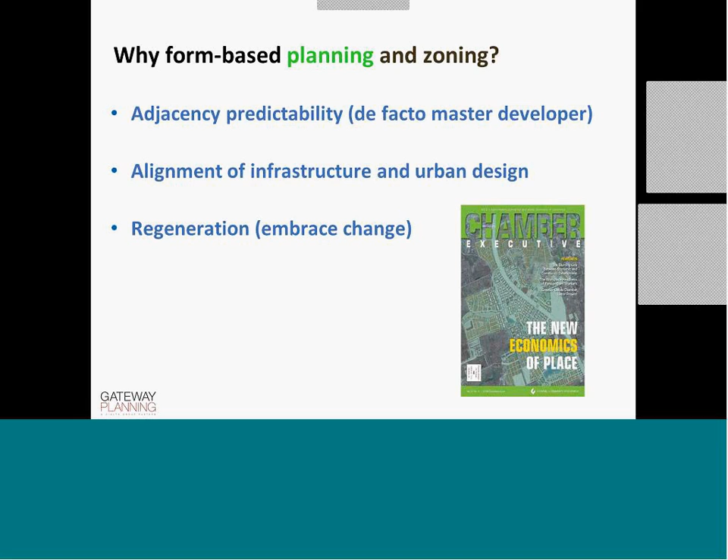Again, as I said, that's the form-based approach. And by the way, when I said planning and coding, I meant that's key — you can't just adopt a form-based code. You have to plan it and then calibrate the code from the planning.

In the development environment, the key, I think, is focusing on building on prior investment and reinforcing authenticity. I want to say it again: building on prior investment and reinforcing authenticity.

An example of one recent effort: a small community southeast of Austin called Bastrop, on the Colorado River. This is the Texas Colorado River — you can see it running from the northwest down to the southeast. This is near where the new Formula One racetrack is, and the airport. Bastrop has a historic downtown on the Colorado River.

There's an incredible amount of potential. It's a linear downtown with the main street that runs parallel to the river. There was an SDAT — volunteers came in from around the country and said, how can you move this downtown into the modern era and preserve what's great about it, which is being encircled by this explosive growth of Central Texas?

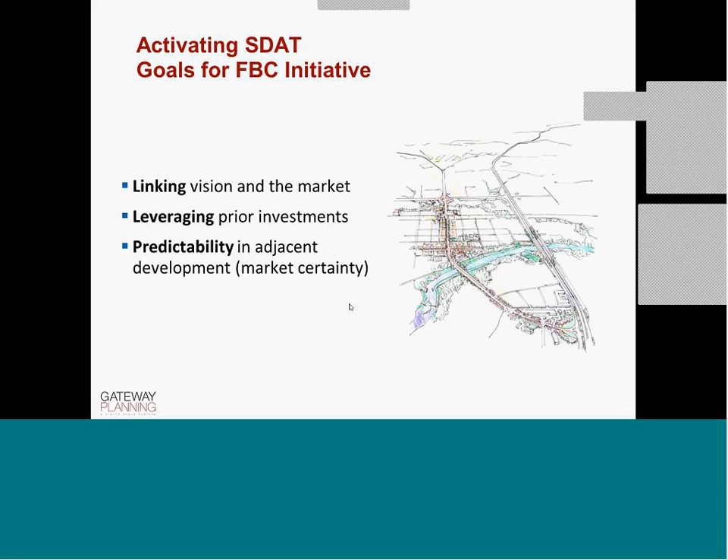Consumers of places — placemaking and development real estate are linked to the market because the consumer wants walkable places. Leveraging prior investments, as I said, historic cores have a lot of things right that were done 70 to 100, 150 years ago, and this notion of predictability.

Predictability means: if there's a block in a downtown and I want to borrow money to build a new building on that block, but I'm on the block next to it — I don't know what's going to happen next to me under a conventional suburban zoning regime applied to a historic downtown, which is typical of a lot of places in America today.

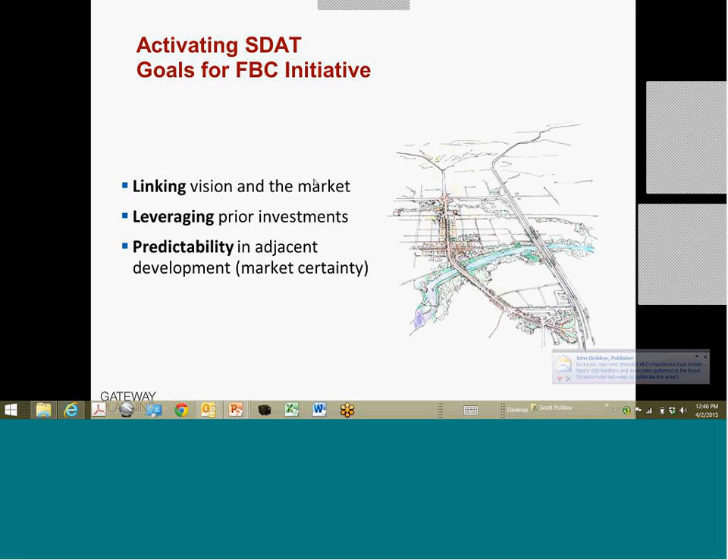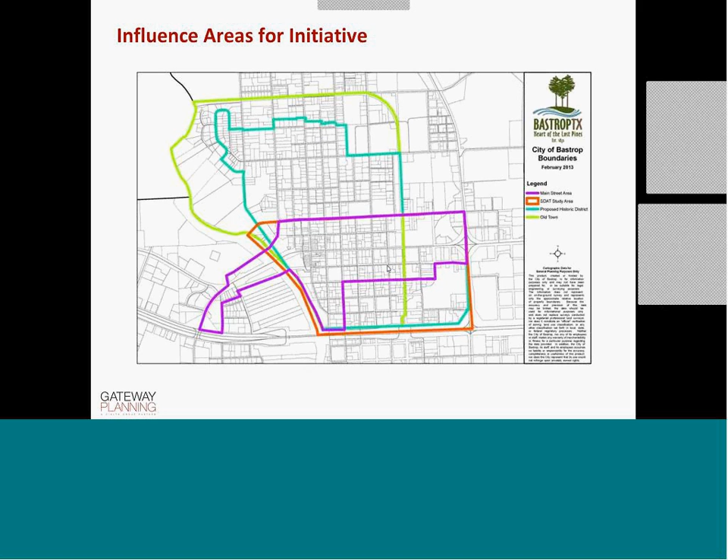The question at the beginning of the planning process was, what's the planning area? And we said to the city, let's have the courage not to establish it at the very beginning. Let it go organically as we go through the process, understanding what stakeholders believe should be the influence area for the downtown redevelopment initiative.

We did a market study with Catalyst Commercial, Jason Claunch, who once worked for Billingsley Company Development. Lucy Billingsley started that company. She's the daughter of Trammell Crow.

We did a series of interviews around a map and aerial, taking note after note with meeting after meeting to understand the politics of the market and the culture of downtown.

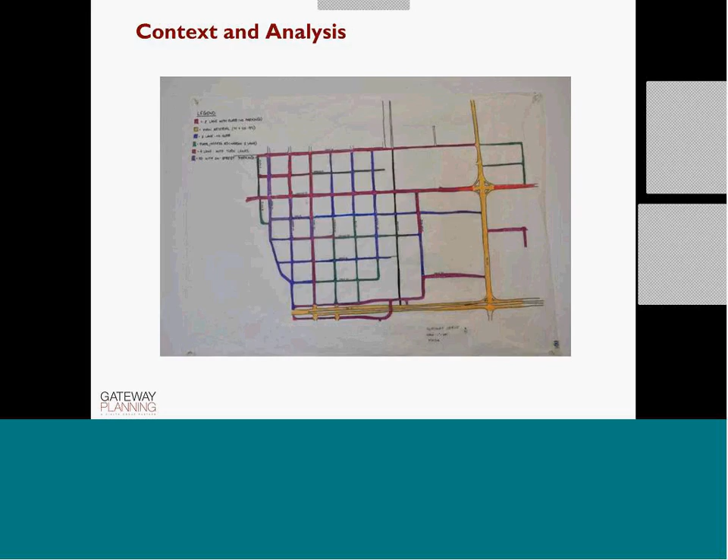One thing we did was say, look, Main Street - and this is the aerial view down - most of the historic building fabric is still there. For Main Street, it was basically about how can we code this for preservation without encouraging too much change. In this code we developed, we focused on the process of reinforcement versus the process of redevelopment.

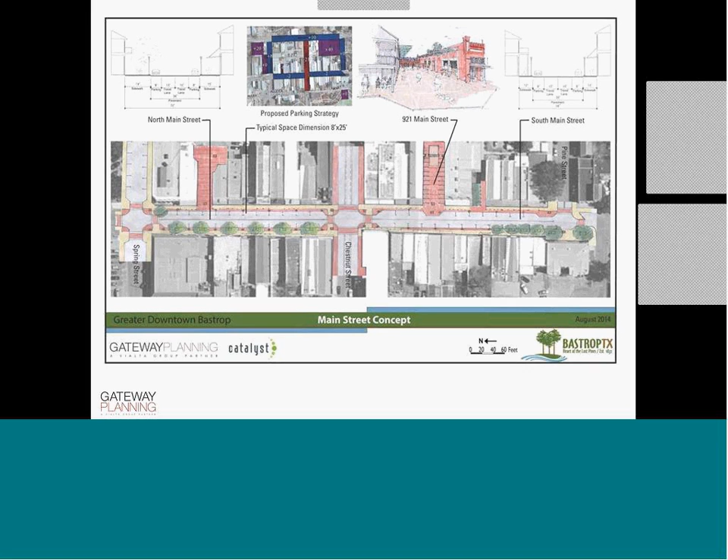This is illustrative, but I believe in the form-based approach - if you don't go to the building scale and design analysis, it's very difficult to calibrate form-based codes for development.

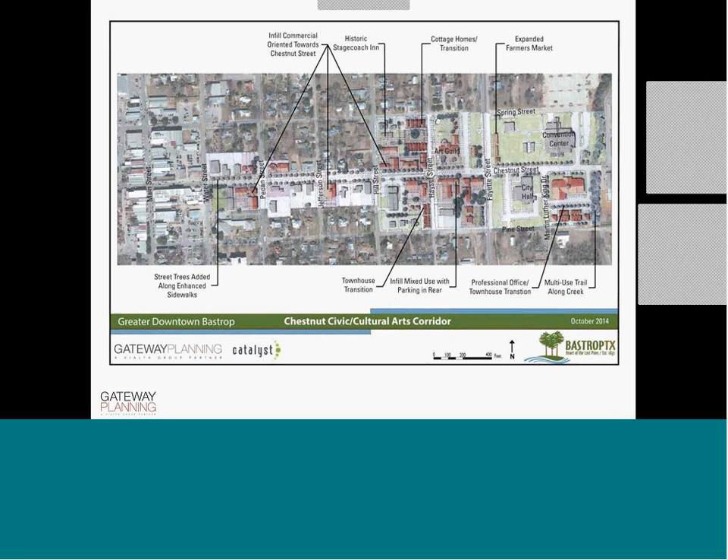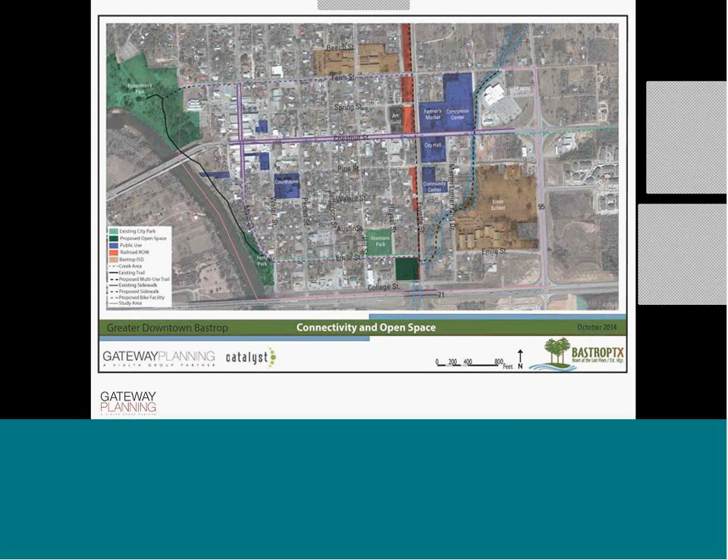We looked at the various additional neighborhoods around the core of downtown, and went back and started refining our connectivity strategy in terms of infrastructure.

All that added to the creation of a regulating plan, which has what we call character zones. If you're using the SmartCode, it is essentially the transects, but in this case we didn't use a transect-based code. We used a code we created from scratch so that each character zone really brings the authentic fabric to these different distinct areas.

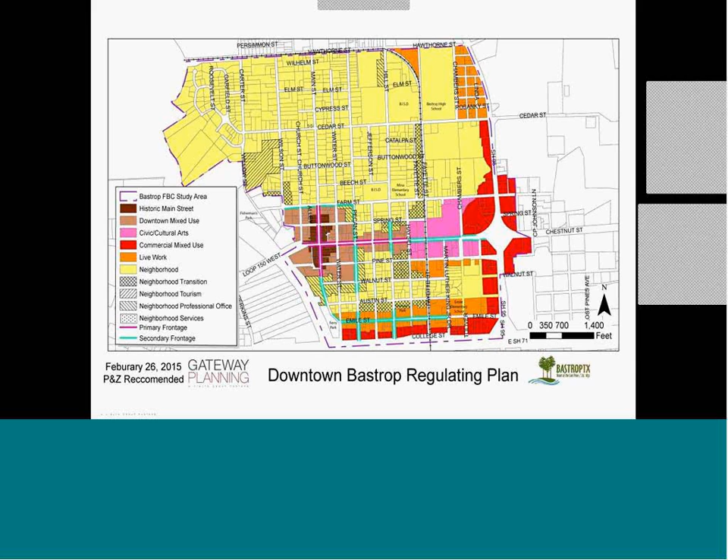You can see the dark brown to the left for 3 blocks is the historic Main Street. The mixed use is around it in the lighter brown. As you go into the neighborhoods, there's an old courthouse area that has a lot of converted businesses - we call that the commercial mixed use - and we have some transition areas.

And then we started to flesh out the character of each of these character zones. So, for example, the neighborhood professional office, which is the yellow area around the old historic Main Street and the house, we start looking at the scale and types of uses that might be allowed.

Remember, form-based is still regulating uses, but not as a primary regulation. You characterize and categorize the uses for each character zone that would be allowed as a matter of right.

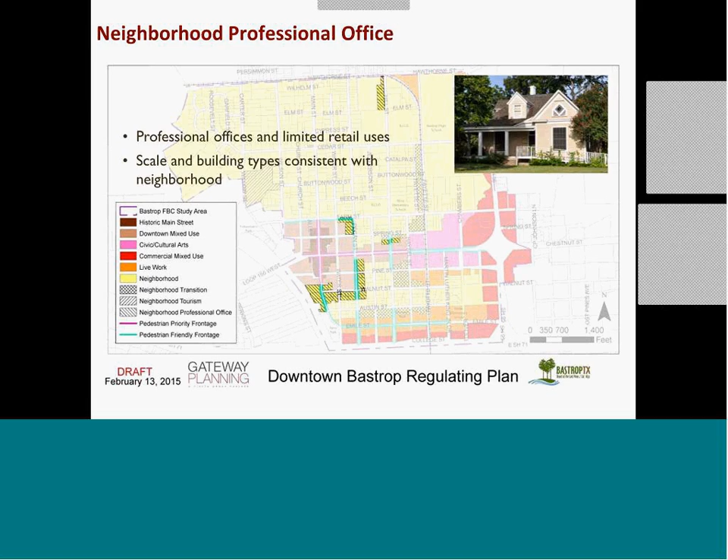The various transition areas—remember also, form-based coding focuses on transitions within the neighborhood versus buffers. That's power from an economic development standpoint. With buffers, you lose the opportunity for that fine-grained experience, the people experiences, the better architecture, the more fine-grained infill.

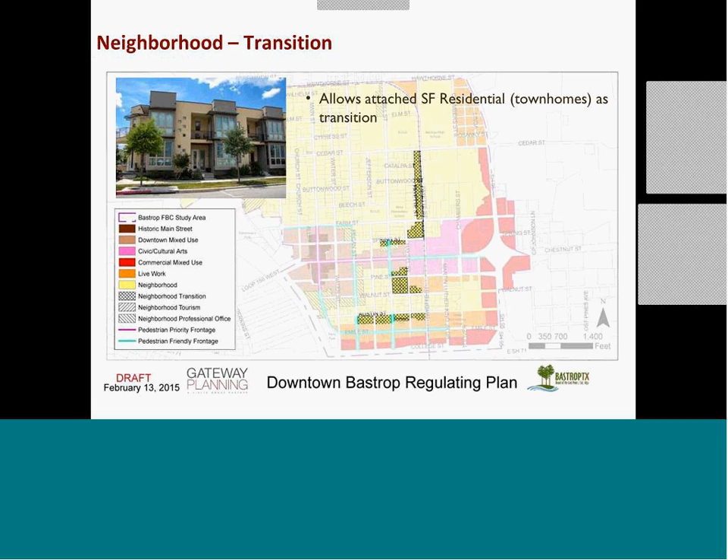If you use buffers and walls and hiding things versus transitions, like townhomes for example, as you can see here, which we're coding for, so from the more commercial development to the single-family, code it for townhomes and show how the townhomes can be developed. That's much better than walls and heavy landscaping buffers.

Code itself is broken down into fairly simple component parts. Regulating plan—we use the early planning as an illustrative vision and actually go through the actual elements.

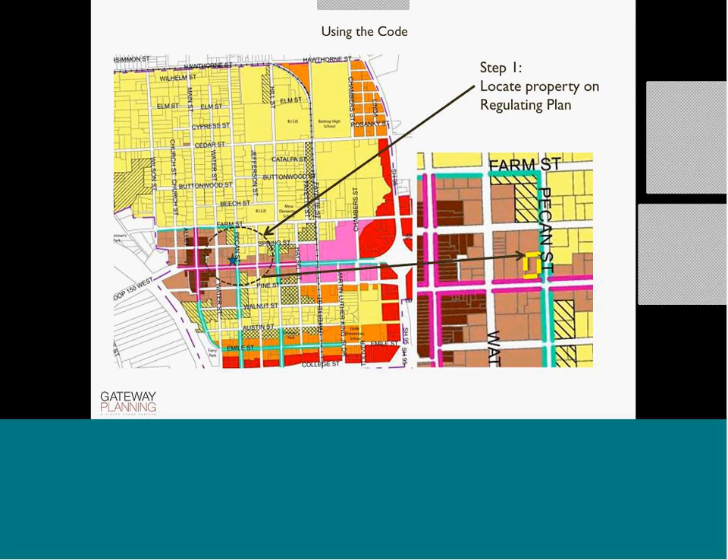And so in this code, the use of it is pretty simple. We locate the property on the regulating plan. Step 1, what character zone is it in. We then determine what type of frontage it has, and what we mean by that is the economic development benefit of form-based codes is to tie together the frontages in front of the buildings and the frontages that are the transitions to the street itself—that's the pedestrian zones or the hangout areas.

And we code both to ensure that we align the context, character and function of the private frontages, the forecourts or the entryways, and the cafe environments to the public elements of the pedestrian zones.

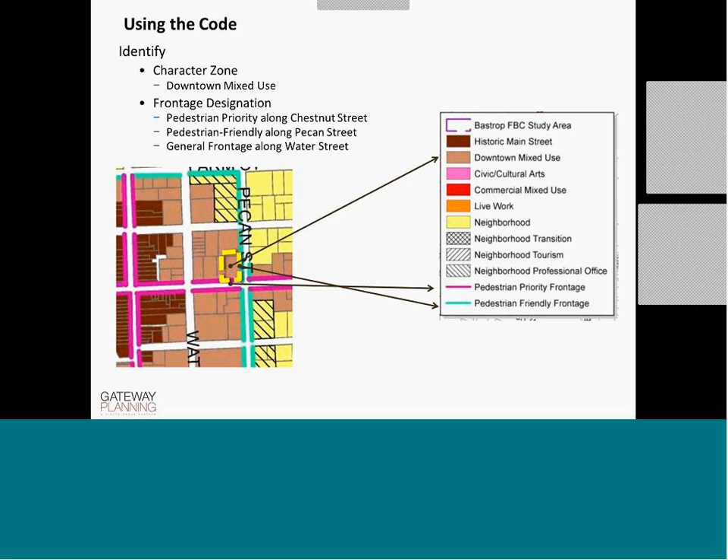Within that character zone, you look for what is an entitled right, a use as a matter of right, and it tells you in that character zone what uses you can do.

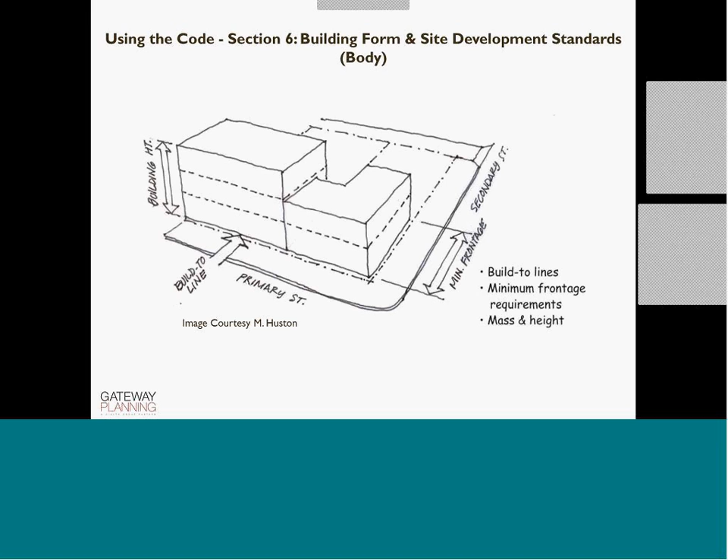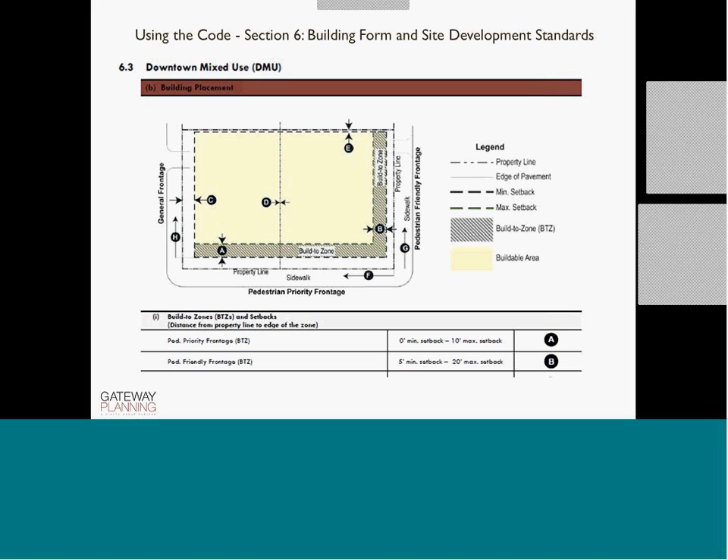And then we use a metaphor in the code: the body, clothing, accessory, or jewelry. First, you look at the body of it, looking down onto the diagram—each section says where can the building land, where can you set it back or set it to the property line, where is the parking going to be allowed, and where's the pedestrian zone.

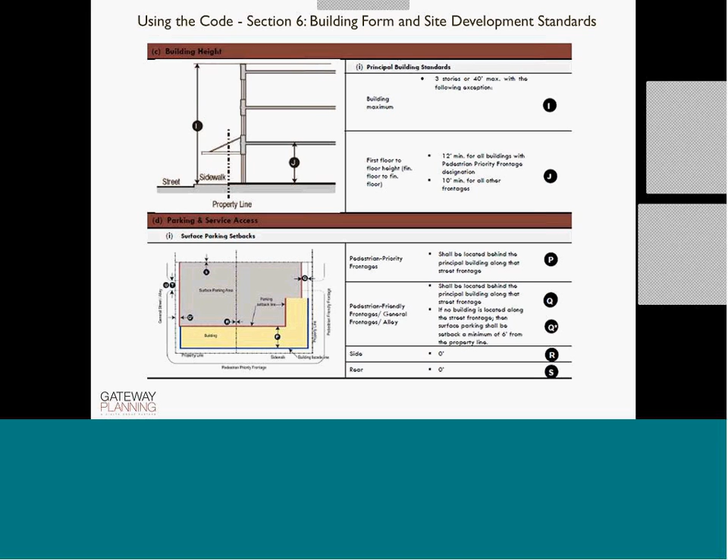Similarly, for the vertical elements, what's the height and what are the basic appurtenances relative to the buildings themselves.

Then we code for what we could call the clothing—the basic materials and functional architectural requirements. Do you have to have a shop front design, a sufficient minimum amount of windows so that the building says, I'm here, come to me? What kind of basic elements do you need in terms of materials? And in a redevelopment environment, we allow for a lot of different materials instead of trying to overly prescribe them.

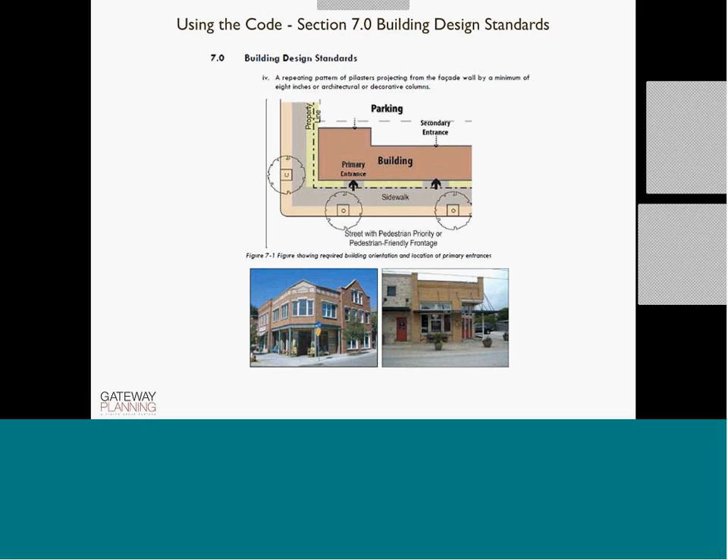Accessories to things in the pedestrian realm are, yes, more the responsibility of the public sector, but you want to make sure that even though these are not required because they're in the code, the public sector, from a health and safety standpoint, can always make these changes.

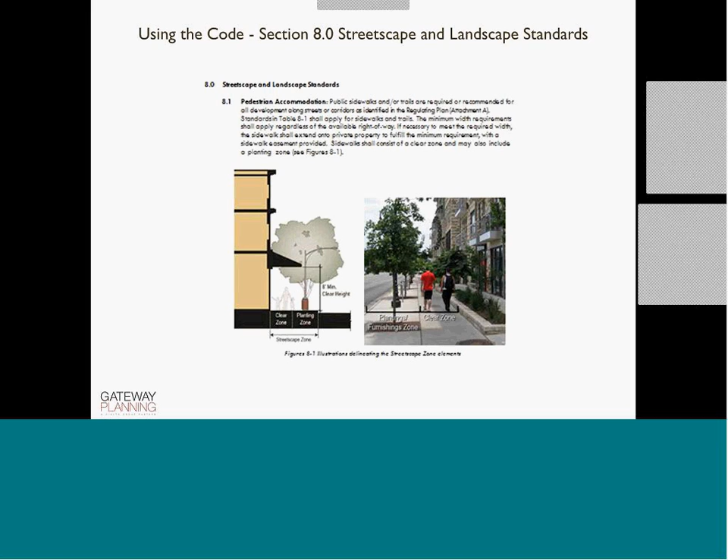Just because we show street trees in this particular diagram for this location, that doesn't mean the engineering or public works department has to put them exactly there. But this is sort of a moral commitment, because it's adopted in the code by the city, that we will have street trees and we will have a pedestrian zone in this location.

And then minor modifications—so that if a particular block and building shows that the build-to line can't be adhered to, they're off by 5 feet or 8 feet, why make the applicant rezone because the applicable build-to line for the building can't be adhered to? The city manager, his or her designee, or the planning director can administratively make those modifications, as long as the intent of the code is followed.

This is huge for economic development. If you make a small investor or property owner go through a 6-month variance process or rezoning, that may be the difference in their willingness and financial capacity to actually do a great small project.

Ultimately, we believe that if your community does allow for administrative approval of the plans generated after zoning, then the phased approach really gives you the ability to create enough certainty, and staff should be able to review them to see if they're consistent with the overall tool. So under this approach in Bastrop, you submit the site plan and building permit application, staff reviews it, and if it's fine, the site development and building permits are issued.

Now, some people and some communities still want to go through a public hearing for site plan, but if the form-based code is done carefully enough with enough site detail, then from an economic development standpoint, if the market adheres to the essential rules of the form-based code, we believe they should go ahead with administrative approval. Besides, if staff doesn't believe the details have been appropriately applied to the site plan, they can say they're not going to approve it, and then an appeal can be taken to the Planning Commission or City Council.

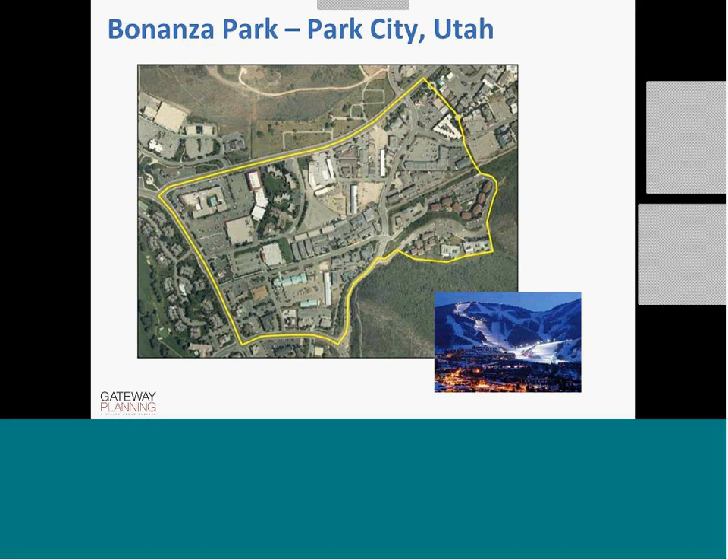I think this is a vision that reinforces the opportunity for this 100-acre area of Bonanza Park, which has some great development potential. It's as you come into town on your way to the resort there, an area that built up in the 60s, 70s, and 80s.

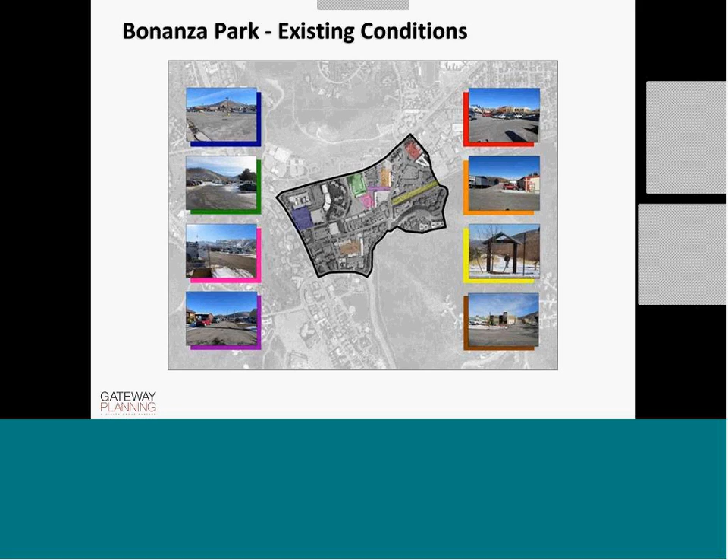There was a vision developed as part of the general plan process before we got involved that had a strong perspective on creating a place for the local community. Typically, all the locals go to the historic Main Street, but a lot of times locals want to find a place with more funky, locally focused businesses, and Bonanza Park was targeted as this place, and also a place to increase housing for the local community.

So a set of planning principles was adopted in the plan for Bonanza Park: connecting the history, forming partnerships, improving circulation since it has a suburban pattern where it's hard to walk or cycle through, and redevelopment in a sustainable manner. With this early planning, a vision was made to use a form-based code, which we think is a powerful tool to deliver the vision and goals of the community, City Council, and the Planning Commission.

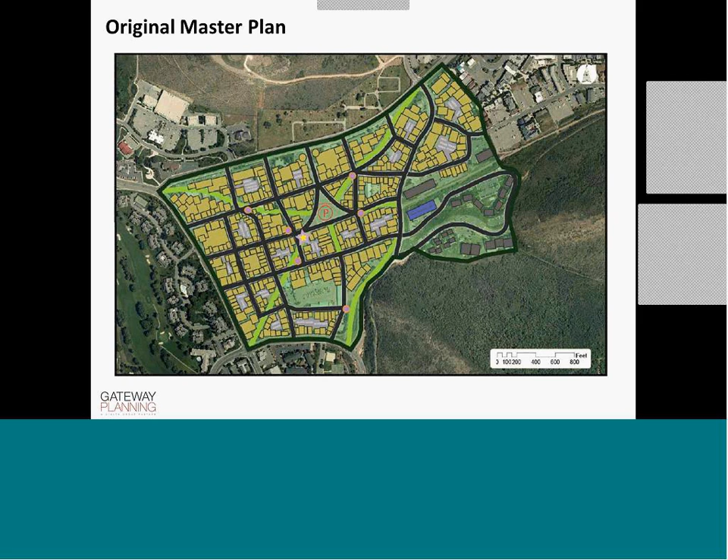This early concept that was developed was a pretty dense concept, and this would be consistent with the vision. Then when we got involved, we started doing additional plans to test the original vision that was adopted by the Park City community.

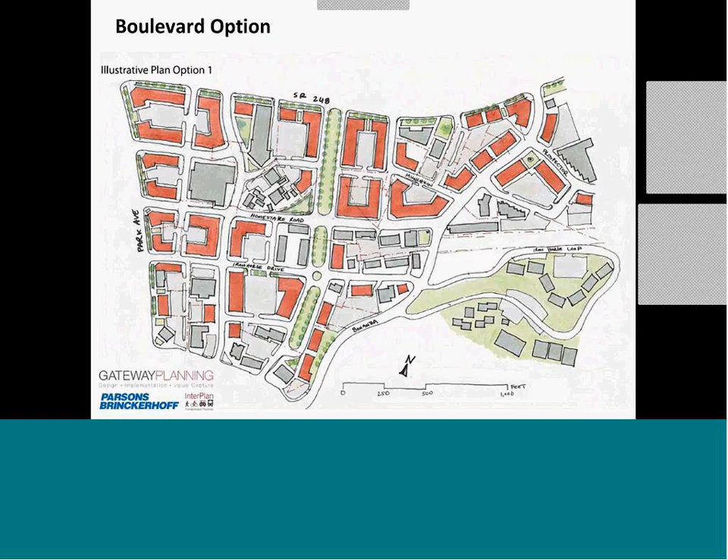We did a boulevard option as opposed to a diagonal option. We got the spur park being the central location where the old railroad used to come in. We also looked at a revised boulevard option.

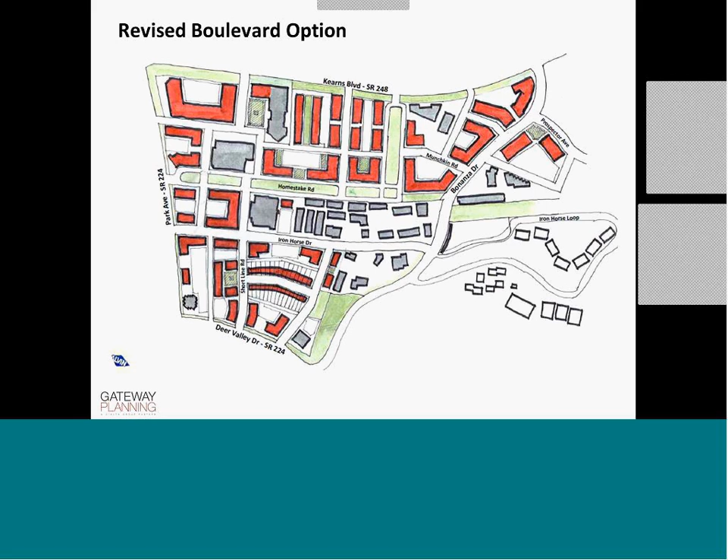We received feedback from hundreds and hundreds of interviews and stakeholder meetings, engaged through a series of meetings over a two-year period, in the planning process. That resulted in the development of a series of character zones, similar to the one we saw in Bastrop, and then we did a development regulating plan from those character zones.

The reason I'm showing Park City is because I think there's more opportunity to implement form-based code based on the process we used in Bastrop, where we take the character of what's existing as you come into the city. You can reinforce the potential of the existing place as a resort gateway, but also have it become more of a neighborhood focus for everything behind it.

Mixed use, the integration of a variety of residential, so that you can begin to create a larger option for locals in terms of residential types. But a lot of them don't necessarily want more of the resort living—they want to live in a more urban residential environment. There's also this industrial environment called Iron Horse, which is functioning very well, with the opportunity to reinforce the small businesses that already exist there.

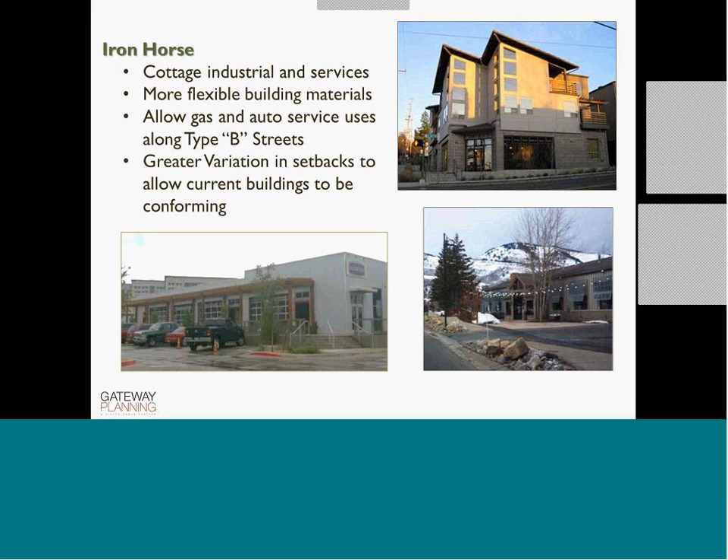The regulating plan then had a series of elements put together, but the challenge was height. So the discussion today about the final calibration and adoption of the form-based code for Bonanza Park comes down to the question of the entitlement of 2 to 3 stories.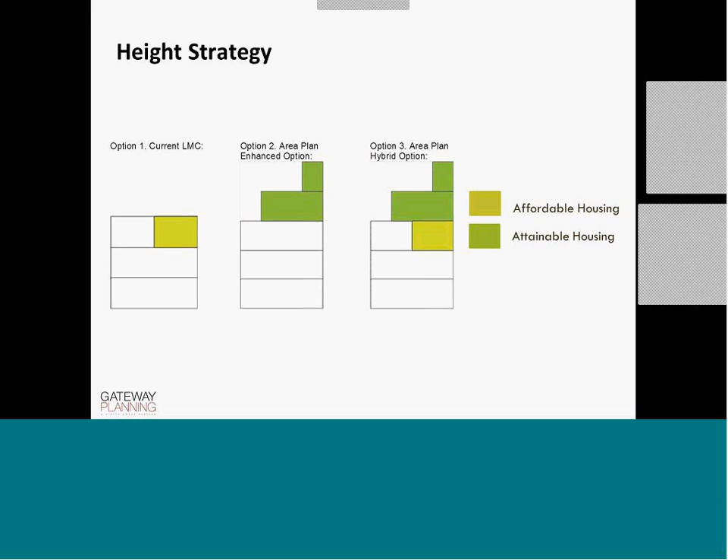Do we go above that? And if we allow somebody to go above it, what are they willing to do to earn it? That discussion is currently in process, whether we go to 4 or 5 stories. Whatever the discussion ends with—a decision to stay at 3 stories or to allow more—we still think the form-based approach is the way to create a better amendment broadening the market options for the local community in Park City.

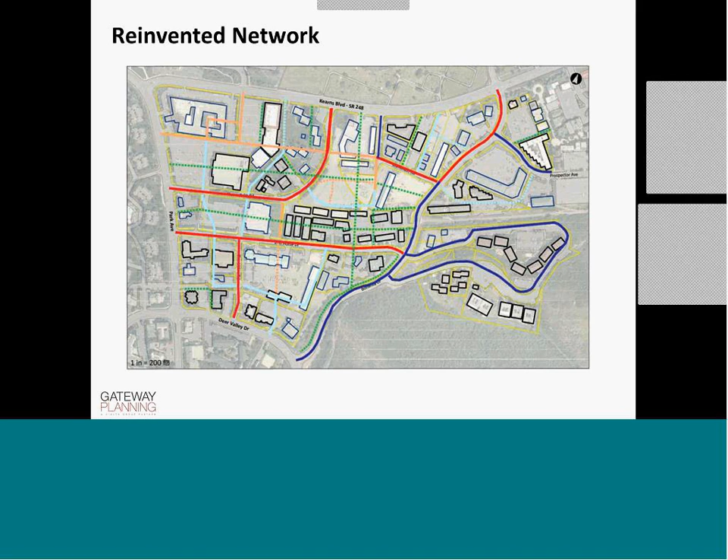Even if you don't adopt the form-based code in a more suburban environment where you have a lot of disconnection and don't have a series of connected blocks, we make the connection through reinvention of the street network. That's where the economic development element needs to be reinforced. The street network itself may not be fully utilized unless it's reinvented.

Working with Parsons Brinckerhoff, Gateway Planning did an analysis with Interplan on what additional roadway connections could be made to the redevelopment of Bonanza Park. We made a cost estimate, and now the City Council, in conjunction with the form-based code, is going to consider whether they should invest in a better connected street network with more walkable streets to complement the code as an incentive to support higher quality, more variety, and a place oriented more for the local community than the resort.

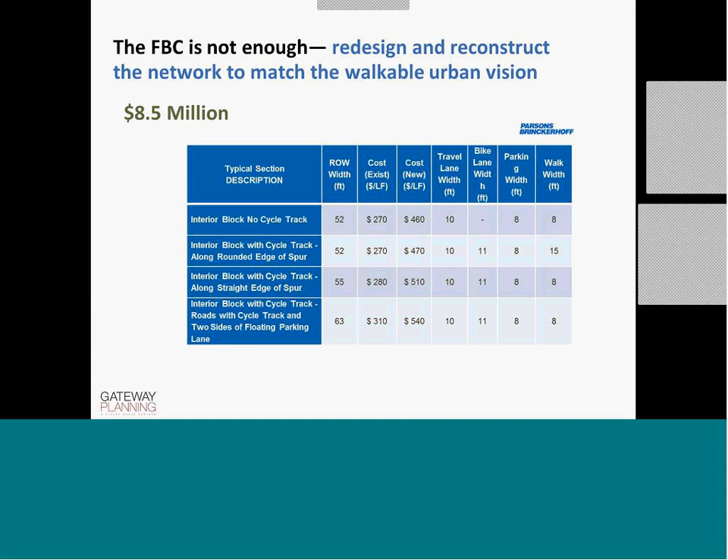The ability to scale up or down the form-based approach: in Texas, just north of Fort Worth, there is a street called Oak Street. This is a town of 7,000. It's a place that had essentially lost its character by the time we got involved, except for a great little restaurant called Babe's Chicken House, which would attract 1,000 people.

People would stand in line for 3 hours on Saturday to go have dinner there, then end up just hanging out in the street. It was very dangerous because nobody knew where to walk or where to park, and then eat, and then they would leave. So we looked at the historic and authentic past of what was once a working class community.

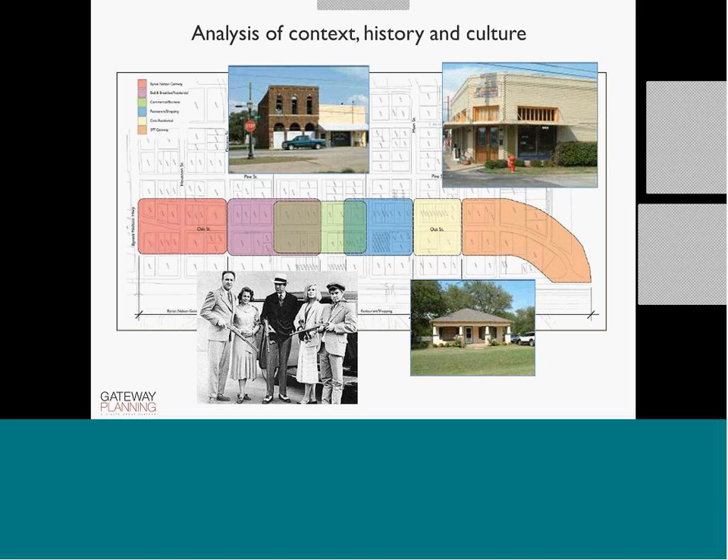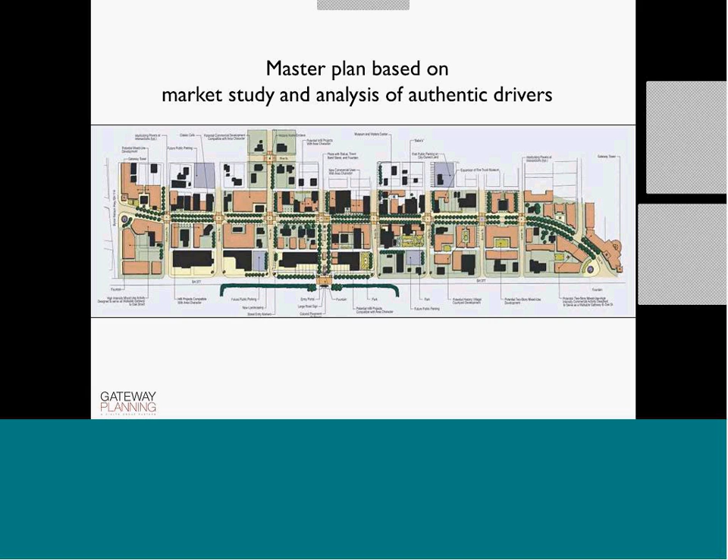But these are the important things that create the basis for the calibration of the code. Our strategy was, how do you build on the destination traffic of Babe's and another great restaurant? The process of planning looked at what the infill potential would be. You can see with this figure-ground, there's a series of pocked, mainly empty parcels. The blacker shapes are the existing buildings, and you can see the infill based on our market analysis.

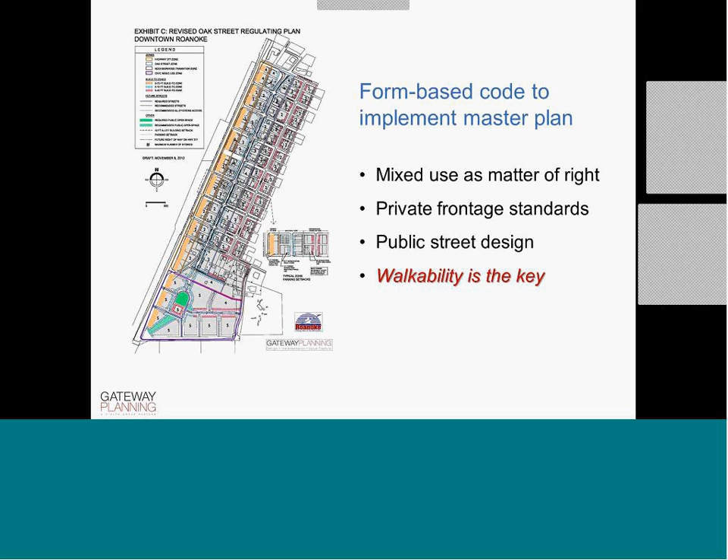It had a form-based code that was simple, only about 15 pages because it's a small area. It wasn't a complicated code. We did a study to calibrate that code, and we ran a scenario to figure out what we needed to do to create a more walkable environment on Oak Street.

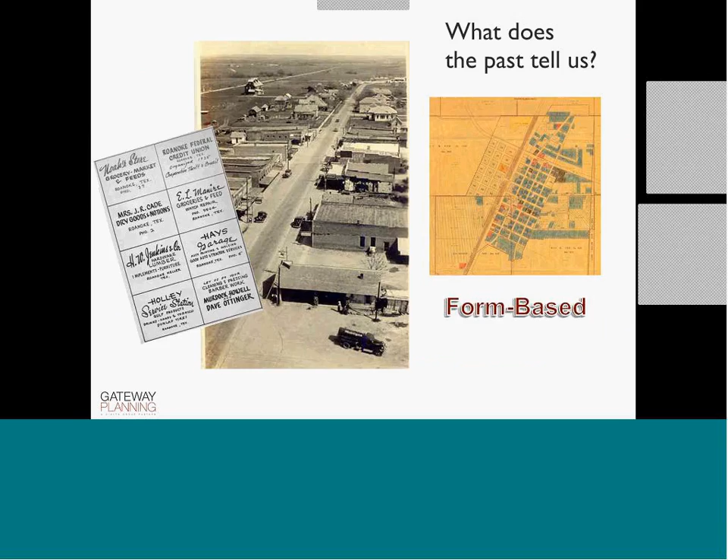If you look back at this image, right here it connects property to property, parcel to parcel, building to building. It's a suburban environment that could become a walkable, urban place.

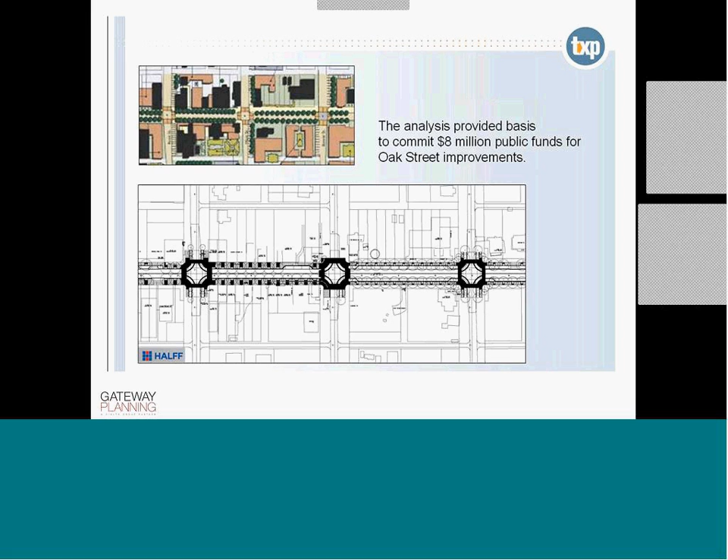We went back and looked at the design potential, and you can see our master plan was then turned into a schematic, working with the engineers. This is 2 years old now; actually, it's much more developed today.

By bringing the form-based code and reinventing the street under that schematic, you can see we reconstructed the street. The form-based environment creates continuity going down the street through the frontages of the buildings, both the private frontages and the public frontages.

You can see how redevelopment started to occur immediately under the vision of the original plan. And by the way, Babe's is still there, and it's rocking. Also, to the right, you can see that's the mayor's dad's car wash. So the nitty-gritty stuff doesn't have to go away.

Someday, when the quarters that the mayor's dad collects are outweighed by the value of the property, he'll probably either partner with somebody or sell that property under the form-based strategy.

Today, Roanoke is rocking, and here's a sense of the impact. In 2006, the land itself was valued at $4 per square foot, and just 6 years later, the tax assessor valued it at $12 a foot. There are now about 10 restaurants, adding another one or two every year, generating about $600 a square foot in sales plus, which for mom and pop or regional restaurants is very, very good. Many of them are exceeding some of the best sales in all of Dallas-Fort Worth, and that's the new city logo.

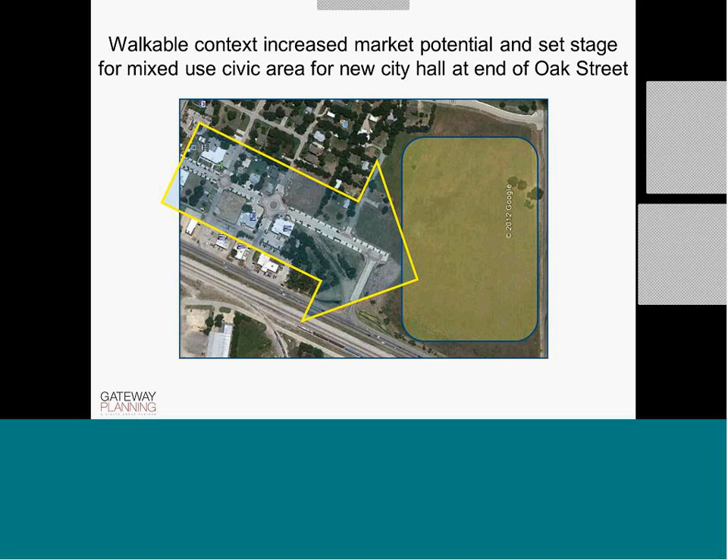There's a parcel at the end of Oak Street, about 20 acres, now set up to become a mixed-use development opportunity. The owner is waiting for a developer to make a proposal. The city is committed to building a new city hall in the middle of that 20 acres at the end of Oak Street.

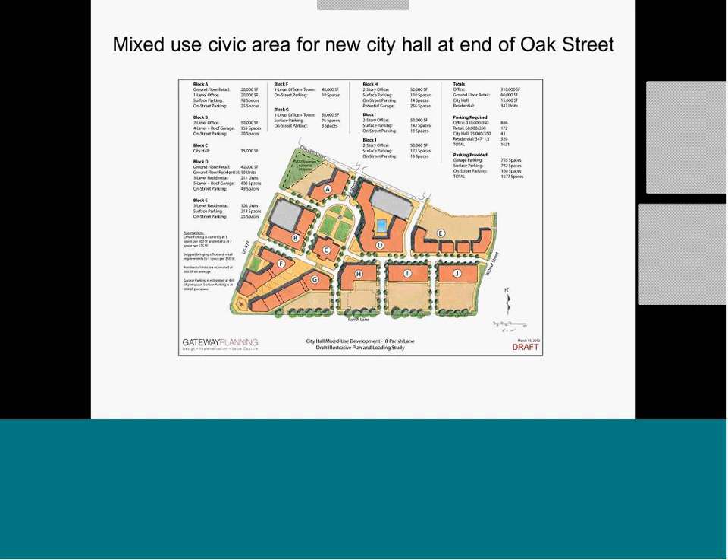So together, economic development, civic reinvention, creation of walkability, have created a cluster of restaurants that all entrepreneurs can participate in, instead of having a single master plan community or a mall. People drive to Roanoke now just to say, let's go to Roanoke and hang out, and when we get there, we'll decide what restaurant to go to. That's the success of redevelopment: when you encourage this kind of entertainment and restaurant environment, people no longer go to a place for one particular restaurant, they go knowing that when they get there, they've got options and choices. They'll figure it out when they get there.

Fine, I'll try to complete this in the next few minutes so we have time for questions and answers. We used form-based for an economic development strategy in Richardson, Texas, in order to create the opportunity to attract a significant employment opportunity.

Form-based for greenfields, as opposed to redevelopment, has some additional economic development principles—you're creating destinations instead of projects, oftentimes across multiple ownership. It can encourage the private sector to emphasize public spaces through form-based approaches, that are oftentimes just thought of as landscape entries, monumentation, and a few parks outside that are really never useful. This gives the ability for landowners to sell to vertical developers and others at a premium. You can create more value both for the horizontal development and the vertical development.

So this is a story of a project called CityLine. This is a build-to-suit for a new real estate firm headquarters in Dallas-Fort Worth, here in Richardson, Texas. This is a 200-acre area, the last remaining undeveloped property at the time in Richardson, Texas.

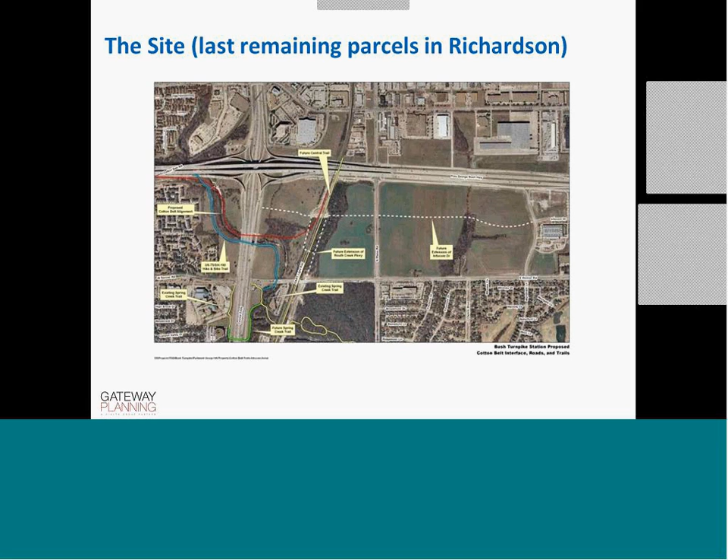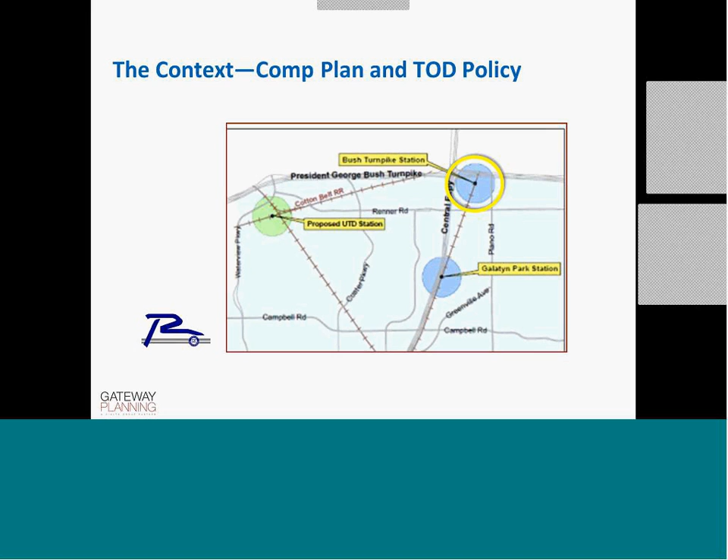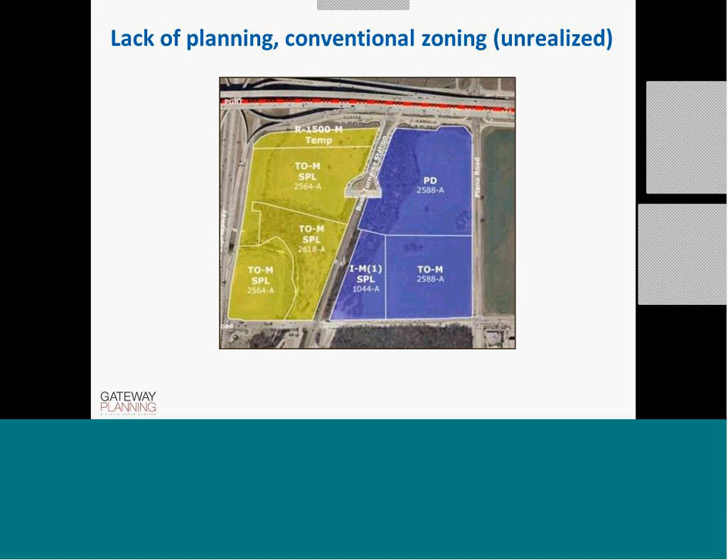So it was sold to my clients out of his trust, and it was in a great location. It's on the Richardson DART line, but the acreage near an existing DART station with two highways was really underdeveloped because it had old conventional single-use zoning for apartments and office, but no mixed use and no real place-making.

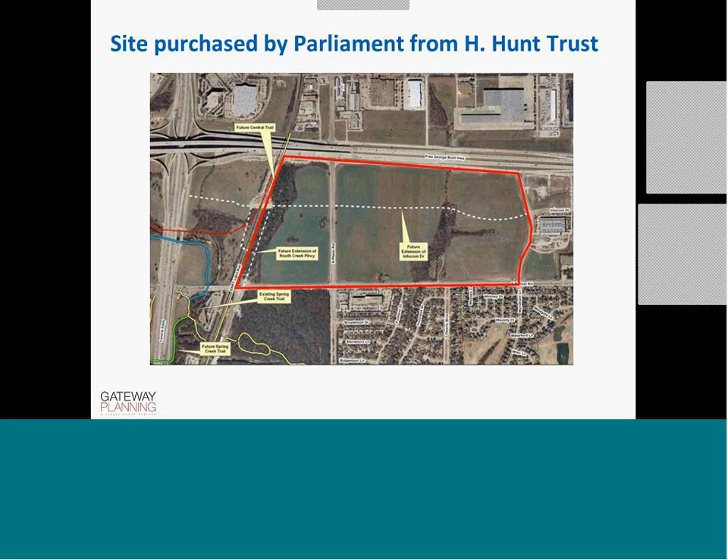So what we did is go through a process of creating and understanding the caliber and character of the site. There's creeks that run through it, there's major arterials that divide it, and that could be reinvented and designed.

So the question was, what's going to drive value both for the developer and be a benefit to the city, instead of just being a basic developer deal? What we were able to determine was that if we use form-based, we could create a place instead of just a series of projects—retail at the corner, an office building behind, garden apartments behind that.

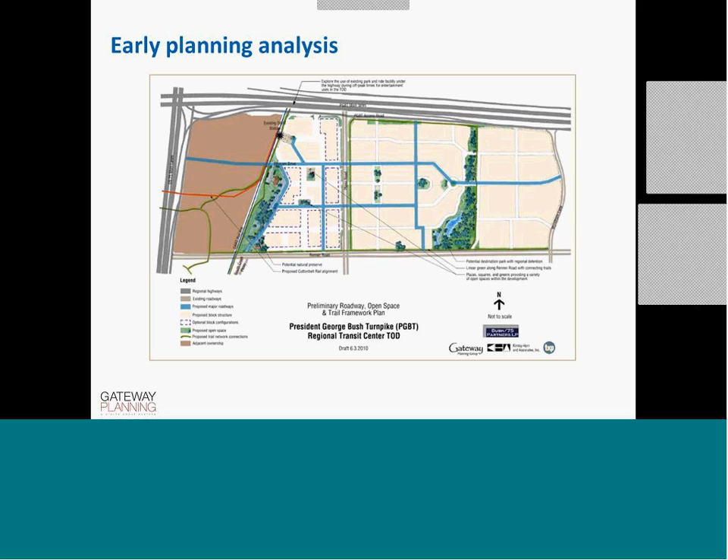Ultimately, we went through the process of creating a framework so that if it was zoned form-based, pieces could be sold off within a great framework in terms of the natural environment, more walkable streets, and access.

We did look at using form-based zoning for our client, who was not a vertical developer but wanted to entitle the land and sell it to a vertical developer to create more value. The goal was to create more tax base from a mixed-use environment, and conventional zoning wasn't attracting that, so the decision was made to use a privately initiated form-based approach.

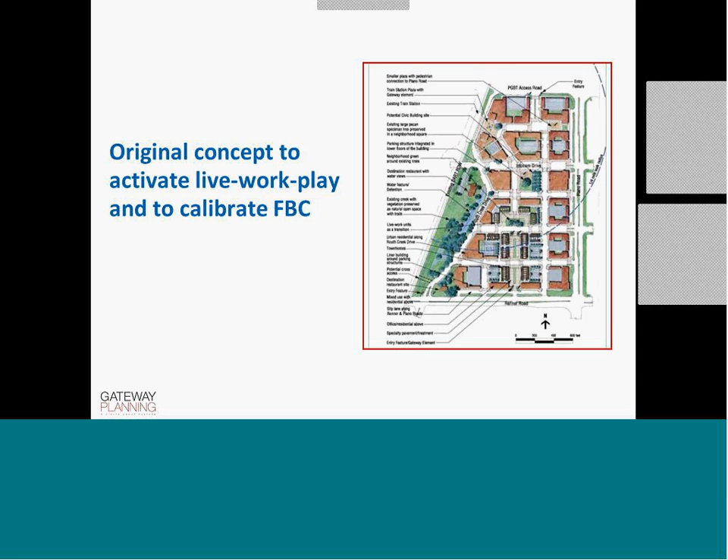This was an opportunity to focus on how to make this last remaining undeveloped part of Richardson a competitive place to attract a job center. This is called the Telecom Corridor, which started with the advent of Texas Instruments headquarters 60 years ago. But we're starting to see leakage of major companies out of the area.

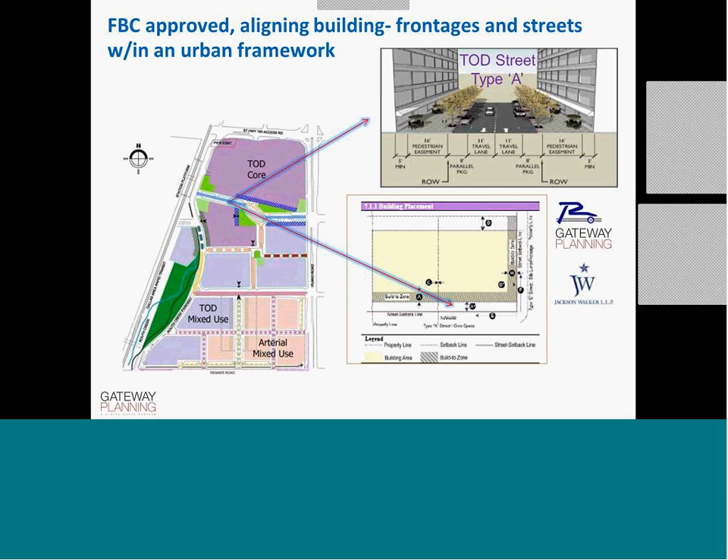So what we did is we applied form-based zoning to the site, connecting the streets within the development that could occur, and how that development could connect over to the rail station. You see by the rail station, to the upper left, that's the DART line you can get on today and go to downtown Dallas or up to Plano, Texas. We created a framework for the connection of the streets to the rail line, and this form-based code was adopted.

The code was adopted, and we started looking at the ability to sell off portions under the form-based code. The code allowed us to sell the lower 18 acres to a high-quality mixed-use developer for urban residential, called Zale/Corson. The key was that whoever developed north of them would be much more focused on quality than on selling off a quick buck, low-quality development.

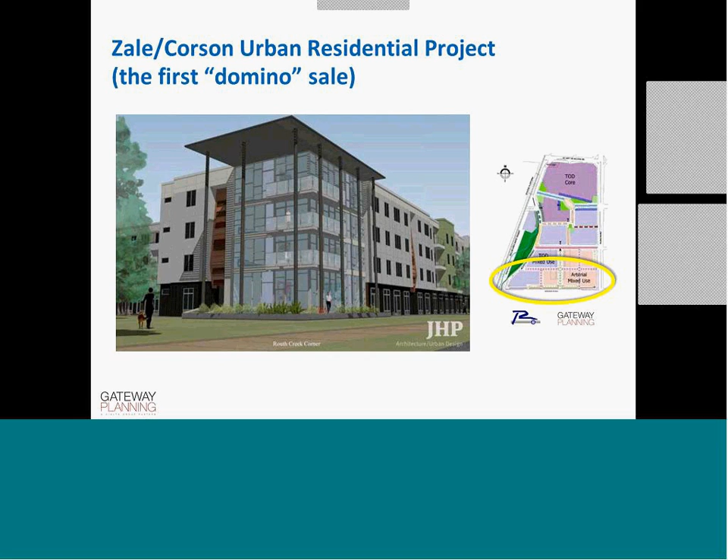Then the remaining land became very attractive because it now had a live, work, play environment on it. State Farm was looking for a new regional headquarters, and the build-to-suit developer named KDC, Koll Development, was retained to look for a new mixed-use campus for State Farm.

State Farm wanted a place for a build-to-suit campus that would have highway access, great convenient transit access, mixed use, live, work, play attractions for employees, and predictable entitlements, which the form-based code would enable. Ultimately, the form-based code gave the KDC build-to-suit developer the idea to bring the State Farm project to this location.

That's when... yes, we're getting a little bit of feedback. I don't know if that's from you or from one of the other callers, but it's kind of a sketchy effect, so if you wouldn't mind taking a look at that. Yeah, it's a better way now. So yes, okay, that's better. Thank you.

State Farm was looking for a new corporate location, and their request was for transit access, highway access, mixed use, and live, work, play to attract the best and the brightest. And so Koll Development came to our site.

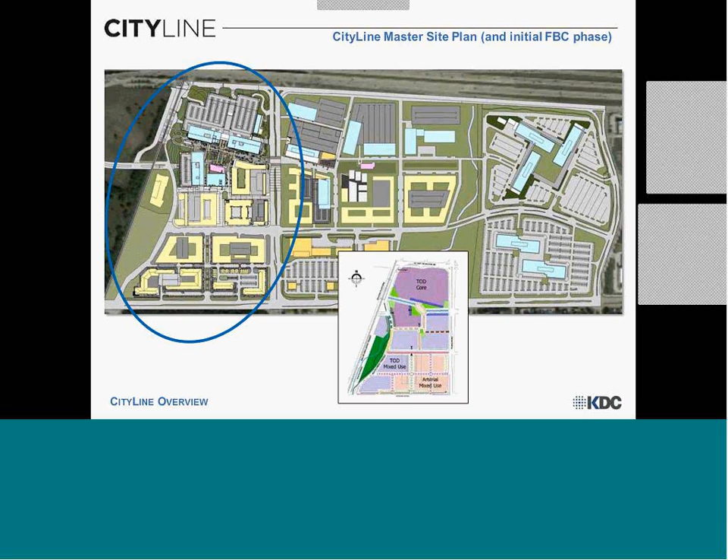We were hired by KDC to extend the form-based code further for the rest of the acreage, and you can see today that it is now a mixed-use, urban, walkable area. The buildings in the upper left, those three buildings, are now constructed, and State Farm will be moving into this live, work, play environment very soon.

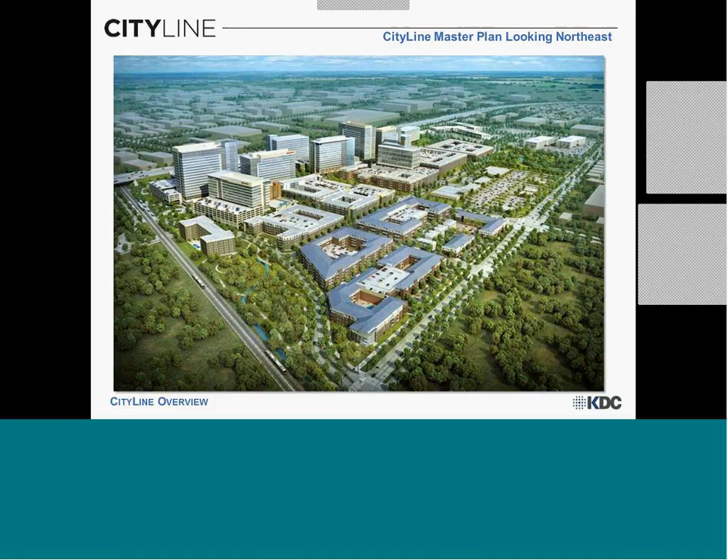This is a great example of how conventional zoning wasn't attracting the kind of development that a great location with a rail line and highways should have attracted. But by converting it through form-based zoning to a live, work, play environment, it became attractive for investment in a new corporate headquarters.

It gives us a privately initiated form-based code that was written at the application of our client, the horizontal developer, and we worked hand in glove with the city of Richardson to calibrate it so that it worked for the public spaces and the public interest.

So to close, if you're interested in more details about how to do form-based planning and coding, there's a Form-Based Codes Institute course, 301, in Salt Lake City, which is an advanced course. Peter Park, the former planning director of Denver, Mary Madden of Ferrell Madden, and Bill Russell, executive director of the Form-Based Codes Institute, teach it. Go to the Form-Based Codes Institute website to register for the advanced multi-day course.

Also, I'd invite you to join this year's Congress for the New Urbanism, held two years ago in Salt Lake City, now here in Dallas-Fort Worth at the end of the month. If you want more information, go to cnu23.org. I'd love to have you here. There's an incredible amount of great walkable urbanism, old and new, and some of the best innovation in real estate around the country here in the Sun Belt. We'd encourage you to come, flying into either airport and training into Dallas for the Congress. We actually have a lot of capacity in the region.